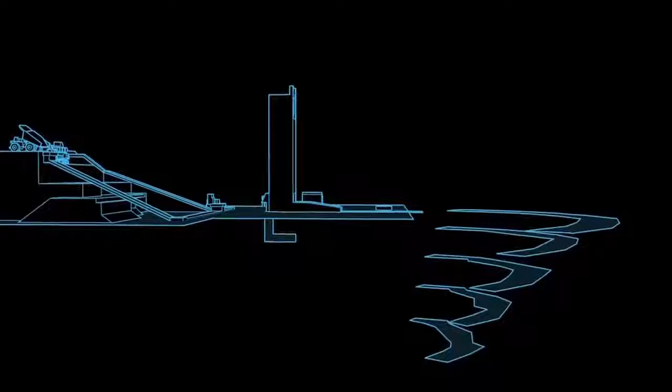Another challenge is decreasing ore grades. Mines are digging deeper and deeper to find ore bodies. As costs go up, so must productivity if mining companies are to stay profitable.

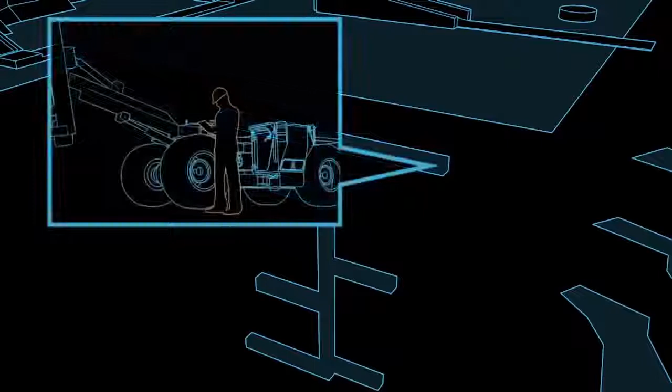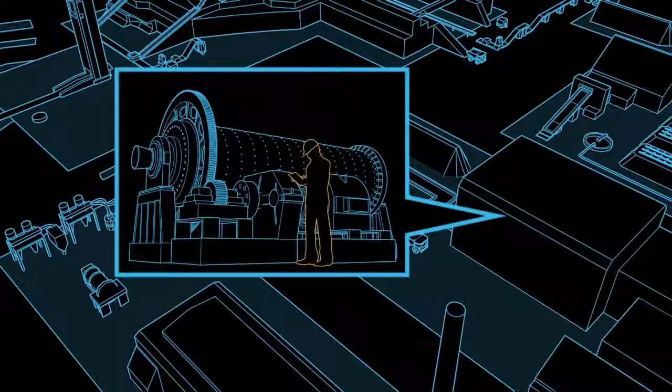Workforce safety is the most important challenge. In spite of efforts being made, accidents still occur, resulting in tougher regulations from the authorities. Workers' safety must be improved, especially in underground production areas, and people working close to heavy machines are also exposed to risks. How can we minimize accidents to ensure a safe production environment?

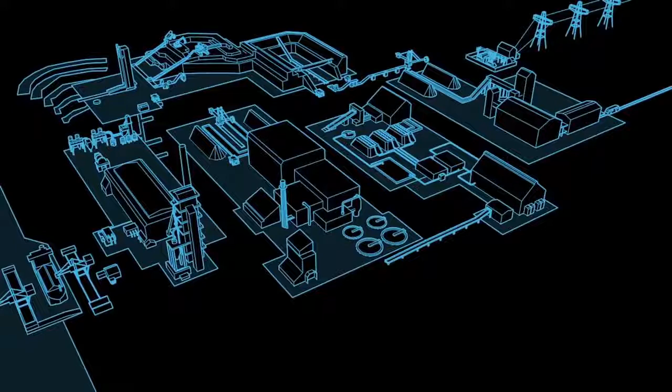Another challenge is rising energy costs. Energy efficiency and the tracking of energy consumption have always been areas of concern for the mining industry. The key for improving energy efficiency is a tight integration between the process and power areas of the plant. But this is not always the case.

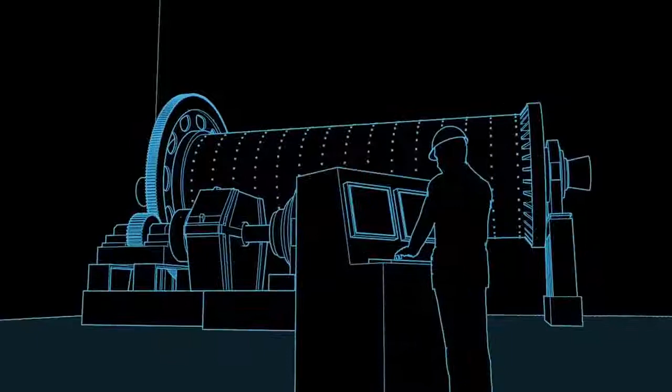The last challenge is typical in many industries. On a site, there's a large number of independent equipment and systems. Each has its own information and interfaces. Operators and control room staff look at different screens and have only separate pieces of information at hand, no overview. We call this islands of automation.

This lack of unity and integration goes all the way into the control room, making it difficult to decide in a timely manner. Let's take a look at a complete mine with a processing operation. It has 4 process areas where operators run their own machines.

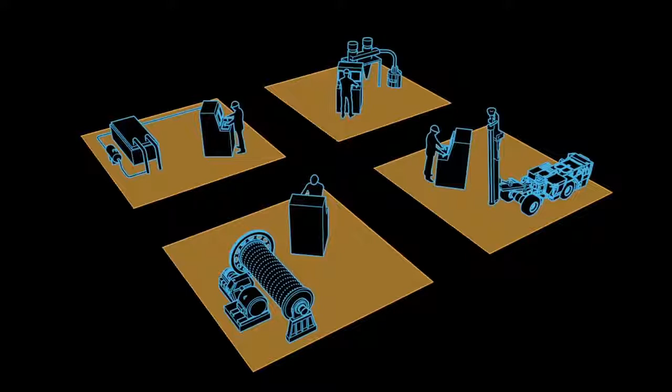Not much communication or collaboration between them. No integration of equipment or systems either. Optimizing the complete value chain becomes a tough challenge.

The key is having a full unified view of the production, from raw material to processing, stockpile, and delivery. An integrated solution helps close gaps in the value chain. For example, with good communication, the blasting and crushing in the mine can be optimized together with the grinding process in the concentrator as a whole.

To summarize, the main challenges are safety issues, lower ore grades, rising energy costs, mines in remote locations, islands of automation and gaps in the value chain.

Now to the solution. ABB strongly believes that the future of mining lies in bringing equipment, systems, and people together. And the answer is automation.

Extended automation. This mine site has 4 separate areas, run by local specialized operators. It's costly and less efficient. We want to bring them together, talk the same language and be integrated into one system where all information is available.

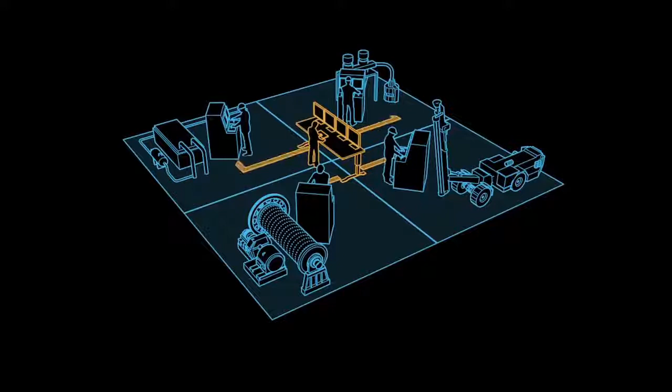Local control rooms may still exist, but the trend is towards centralized operations. With modern control room designs, people with different roles can work together in the same environment. Barriers are torn down, control rooms are consolidated, and experts can collaborate in one place.

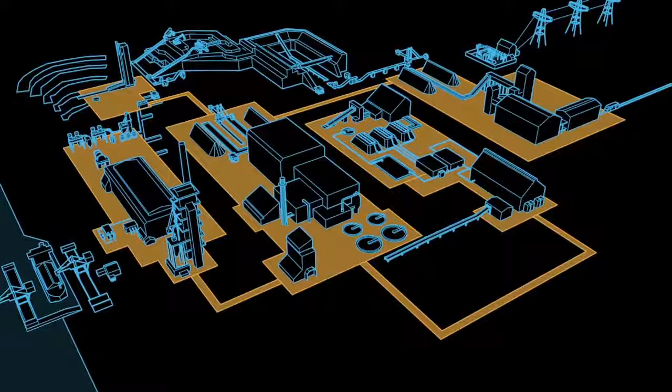Extended automation closes gaps in the value chain and creates a safe, reliable, and predictable production process. It also gives better visibility, from mine to concentrator, smelter, and stockyard. The result is an optimized operation from mine to port.

The beauty of System 800XA is that all information is available to all users, locally, centrally, as well as for mobile operators with iPads or smartphones. The Extended Operator Workplace from ABB is a modern cockpit for mining operations.

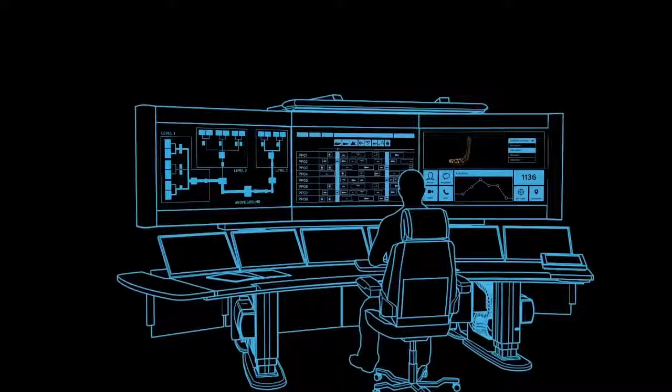With 800XA, everything is integrated. Traditional process control systems, such as PLCs, DCS, and safety systems and electrical equipment such as drives and motors, as well as production planning, maintenance, asset management and documentation systems.

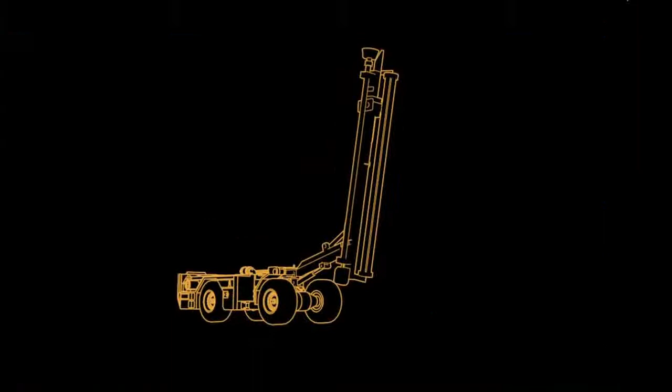800XA can integrate different users, live video, voice and public address systems, web information, you name it. All information is presented in a uniform way, tied to physical assets. It can even include unmanned equipment, helping reduce the number of people working in dangerous areas of the mine.

Bringing equipment, systems and people together for a reliable, safe and predictable operation. That's extended automation in a nutshell. Here are some practical examples.

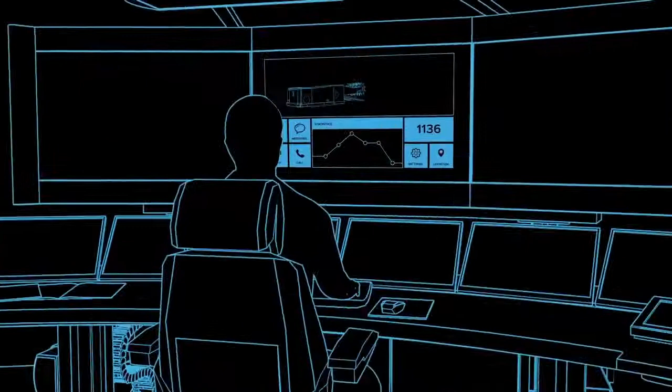Let's start with asset management, a very important matter. There's a piece of machinery and the operator has just been alerted by a predictive maintenance alarm that it will be needing repair soon. The operator can access the maintenance system and see all upcoming work orders.

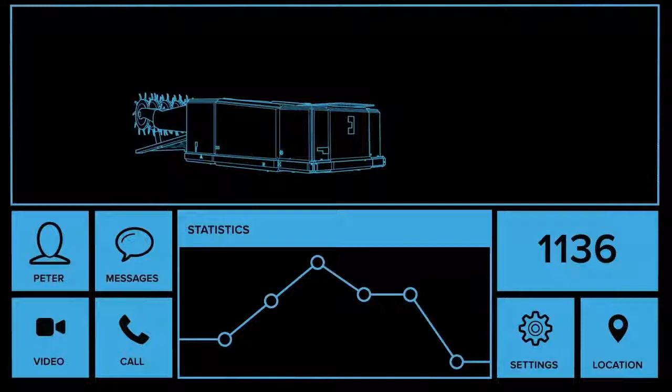It's easy to add new work orders. He contacts the field engineer who views the same information on his mobile device. Together, they decide on optimal maintenance action.

Here's an example of how to control rising energy costs. In some mines, ventilation accounts for almost 50% of energy consumption. Mine vehicles emit diesel exhausts that have to be ventilated away.

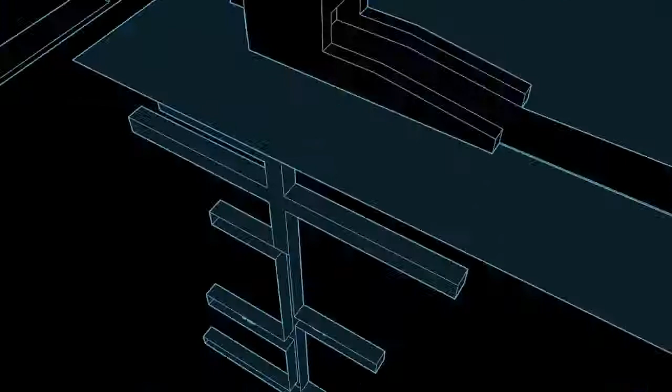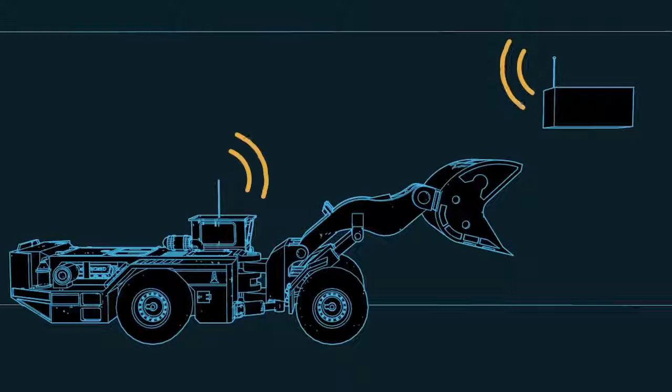The automation system knows where each vehicle is, and all vehicle data, including emission levels, is communicated to the system. The ventilation is continuously optimized for actual need, and the airflow can be adjusted at any time. Minimizing energy consumption while preserving air quality means great savings.

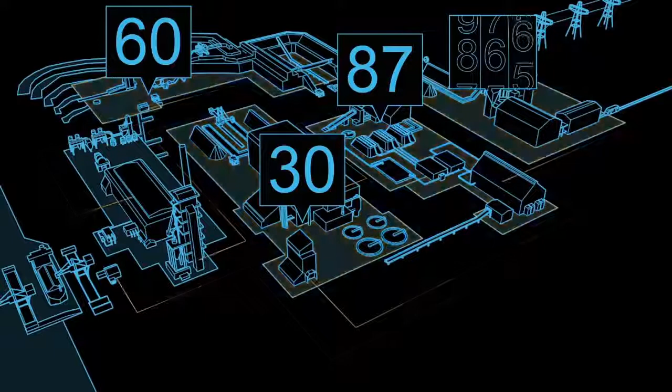With the integration of process and power automation in System 800xA, energy usage can be measured in real time. It enables operators to detect energy thieves in any area of the plant.

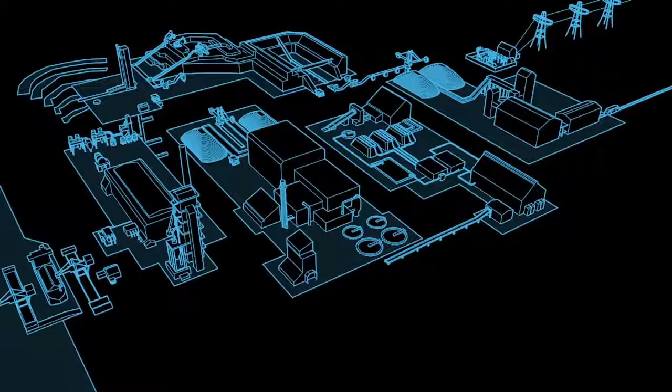Need another example? What about increasing the processing plant performance in a consistent and reliable manner? In the processing plant, impurities are eliminated from the ore before smelting. The plant needs to react quickly to ore property changes. With ABB technology, this becomes possible.

It tracks material movements and properties all the way from the mine to the processing plant. Ore properties are logged and represented graphically, eliminating guesswork. The information is available for other advanced applications, as well as to support operators' actions.

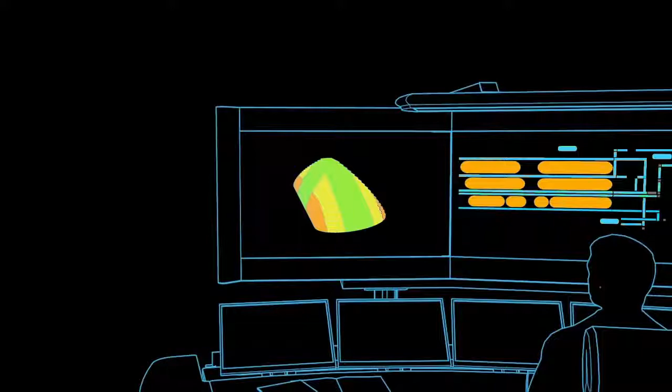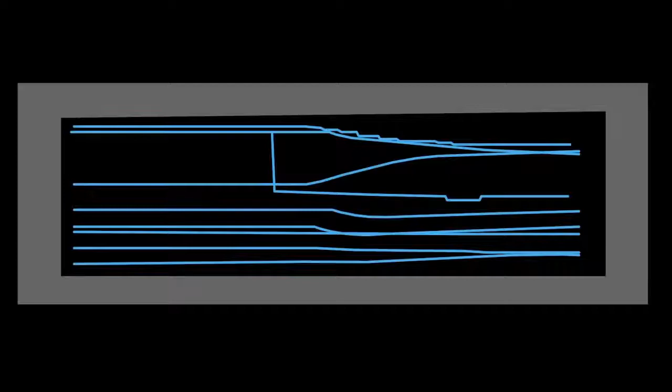Material movements are automatically synchronized with inventory management systems that look after the logistics and the supply chain. Finally, ore information is used by process optimization controllers. They use forecasts of the ore properties to make predictive adjustments to the grinding and flotation circuit. The result is higher equipment utilization, increased production, and lower energy consumption.

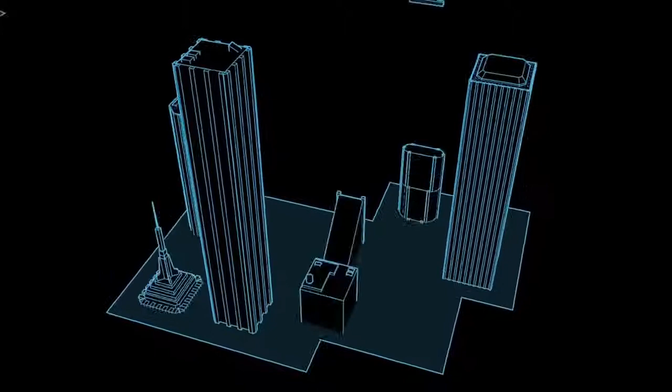Mining companies have become multinational giants, with mines scattered all around the world. With System 800xA, all information from local mines is also available and consolidated into corporate headquarters. This facilitates collaboration across mines.

Production planning, resource planning, specialist support, inventories, spare parts, etc. can be optimized. By harnessing the full potential of ABB's extended automation, mining companies can raise their productivity and safety and achieve a more efficient and profitable mining operation.